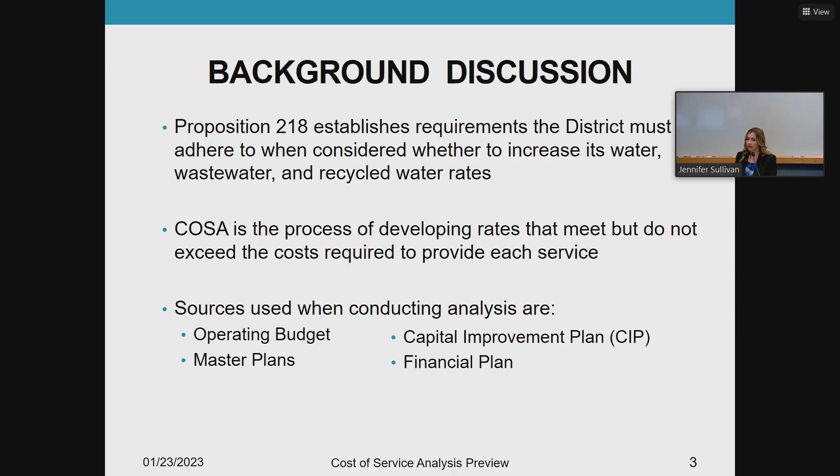Next slide. Okay. So the California Constitution, specifically Proposition 218, consists of requirements that the district must adhere to when considering whether to increase its water, wastewater, and recycled water rates. The cost of service analysis assists in developing rates that meet but do not exceed the costs required to provide each service. There are certain sources of information that are important in conducting the analysis, including budgets, master planning documents, the district's 5-year capital improvement plan, as well as the district's 5-year financial plan. Next slide, please.

The district is currently updating the water master plan, which also... can you go back one? Thanks.

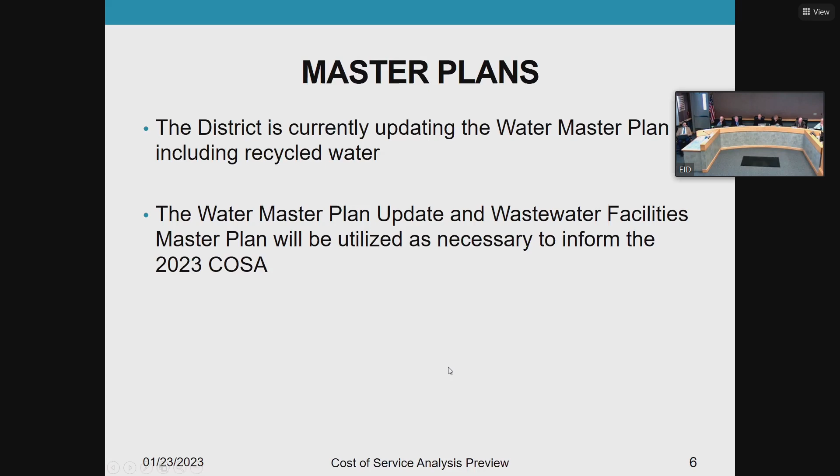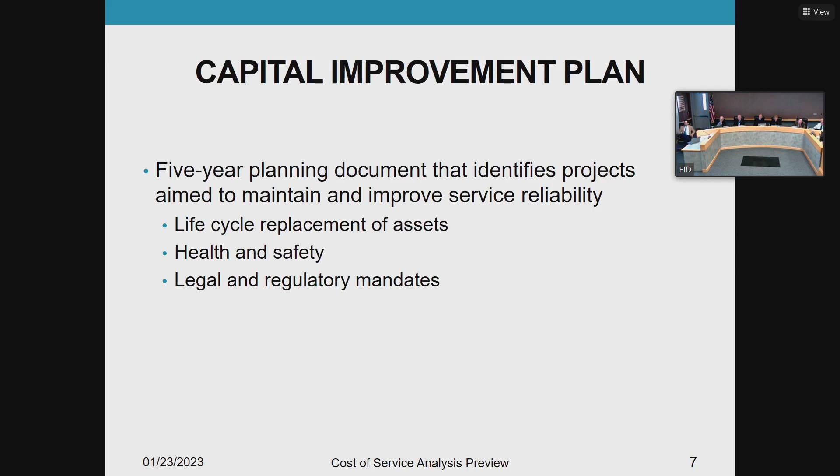The district's capital improvement plan is a 5-year planning document that identifies projects aimed to maintain and improve service reliability, addressing areas such as the life cycle replacement of assets, health and safety, as well as legal and regulatory mandates.

Just a snapshot of the 2023 to 2027 capital improvement plan recently adopted by the board.

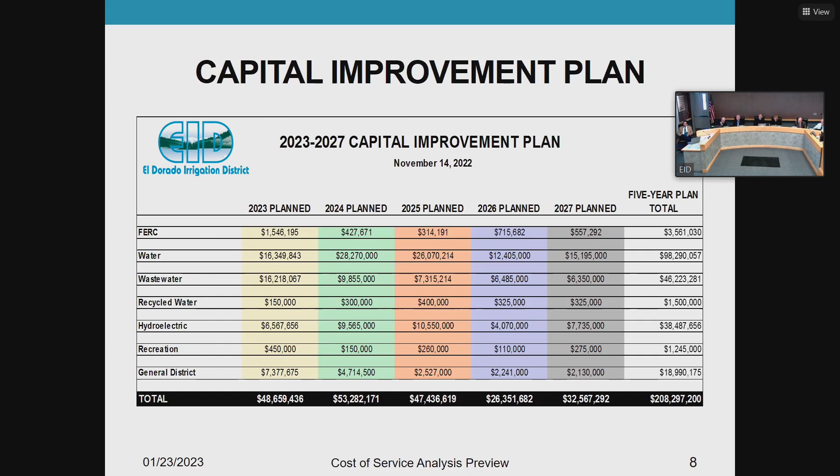Hang on before we switch this one. One of the reasons we're updating the cost of service study was the forecast in our financial plan. I'm sorry, go forward one.

Thank you. We didn't maintain our cash reserves at that level. That was shown in the financial plan, so we're updating the cost of service study to increase our cash reserves to that level. And then also the debt service level, we weren't going to be achieving that in future years as well. So those are the two main reasons we're updating the cost of service study. Thank you.

So as discussed during the approval of the 2023-2024 operating budget and financial plan, staff faced a number of challenges in preparing the plan. Some of those results, as Jim pointed out, included projection of low debt service coverage and low cash reserves. Forecasted rate revenue is not high enough to fund the CIP and maintain adequate cash reserves, as well as lower projections of the FCC revenue.

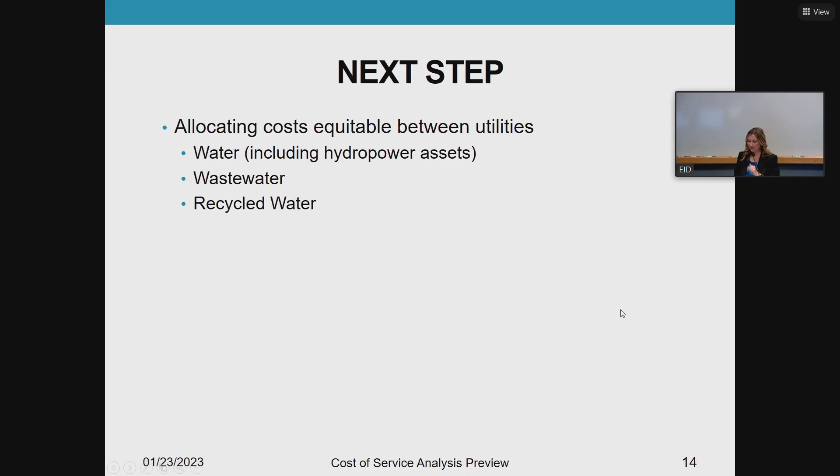So in order to allocate the costs equitably between the utilities, several factors need to be considered. These factors include the allocation of property taxes, water rate revenue-based charges, allocation of debt service coverage, as well as overhead charges. So we'll take a look at each of these individually briefly.

So the allocation of property taxes, our past practice was 60% to water utility and 40% to wastewater utility. These percentages are similar to our water-only accounts, which is about 64%.

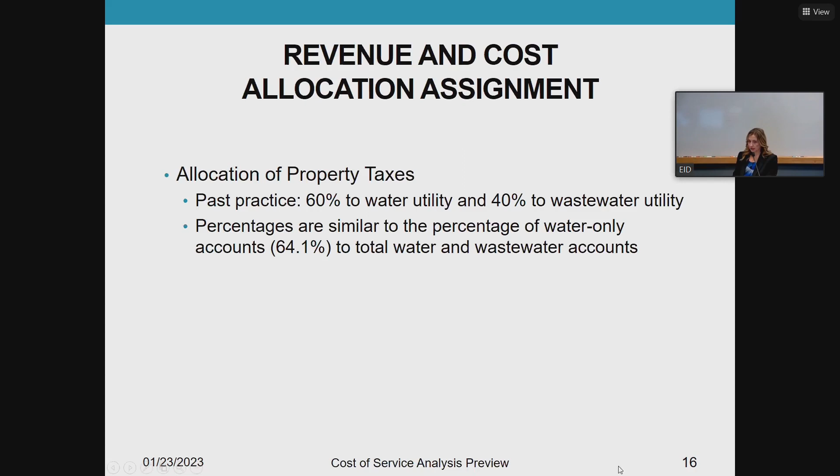In 2009, the district adopted a more aggressive water conservation structure designed at that time to collect 30% of the rate revenue from fixed and base charges and 70% of revenue from the volumetric charges. During the 2010 cost of service analysis, the board did reallocate that to a 50-50 ratio, after determining that meeting the revenue requirements of the district were too volatile when the water conditions varied, or when the water varied due to the weather conditions. And the district has maintained this 50-50 ratio since then.

Our allocation of debt service is allocated based upon the bond documents when originally issued and cannot be reallocated.

And then our debt service coverage, as we've mentioned before, the bond covenants require the district to obtain a 1.25 coverage. Our administrative regulation also sets the financial goal of the debt coverage at 1.7 to 2.0 times, including the FCC revenue, and then just 1.25 times without the FCC revenue.

The same AR also requires that rates generate enough net revenue to adequately fund the pay-as-you-go projects.

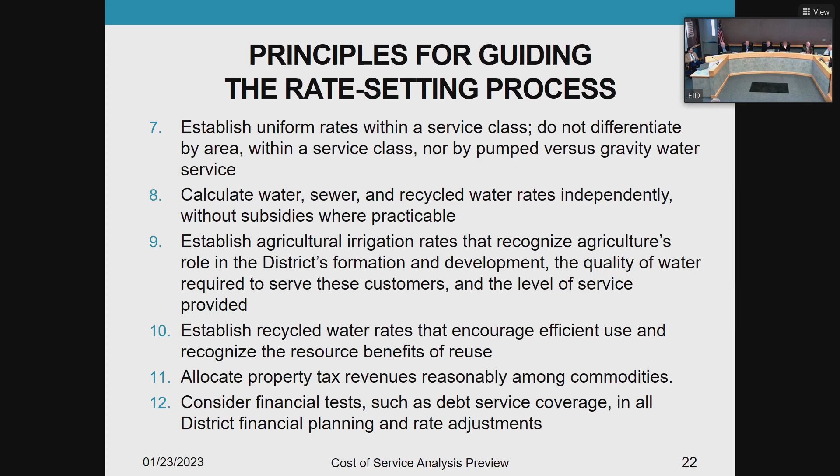Jennifer, for the RFP for the consultant, if I had seen that word published, I would have thought we've already published it and would have asked for a copy. So when you do publish it, can you share it with the board? Yes. Thank you. Absolutely.

Next slide. Pat, do you have a question? A couple of comments on the presentation and observations. First of all, by our past actions, the board has already solidified many of the inputs that go into the cost of service study. We approved the budget, which is a big chunk. We approved the capital improvement plan, which is another big chunk. So the consultant really just needs to take all our costs and divide it by our number of customers. We don't want to spend a lot of money on it. A simple division—no, I'm being facetious—but my point is, we've already established the baselines.

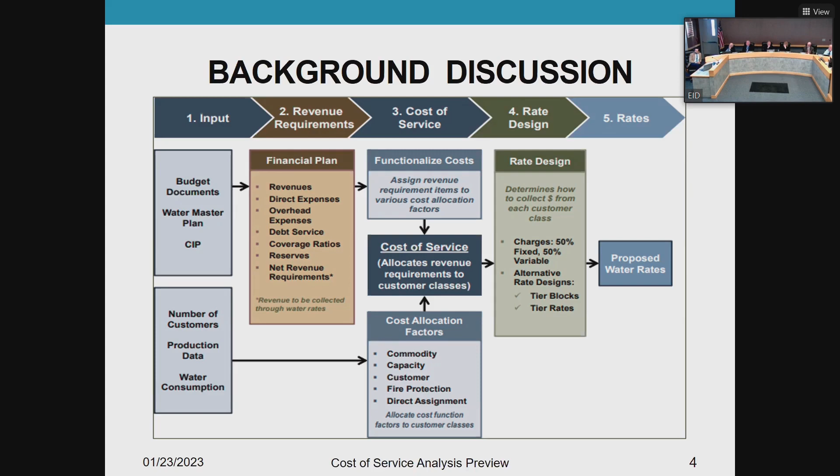Under input, that's almost all staff. The revenue requirements, I believe that's all staff. However, they'll take that and determine what the net revenue requirements will be. And once those net revenue requirements are determined, they'll use their history and background to do the functionalization of the costs, based on peaking factors and meter sizes that we hadn't used in the past. So that's a lot of their efforts, item 3 and 4. And then we'll bring back the proposed rates for the board's approval.

So the consultant would be more in stages 3 and 4, probably. Yes, but they will also come up with the net revenue requirements after considering the revenues, the direct expenses, the overhead, and non-rate revenue that we have from like property taxes and things. Then they'll come up with the net revenue requirements that need to be divided out through all the costs to our ratepayers. I didn't mean to steal your thunder, Jamie, but this has kind of been etched in my mind over the last 20 years.

I appreciate it. Director Anzini? Yeah, one other thing that we haven't really paid attention to, or we have paid attention to, but we haven't made that difference or that buffer, is where we've had a lot of major environmental issues in the last 3 years because of the water coming in, the pipes busting, and of course the Caldor fire. We do have an emergency fund. But recently, we just suffered another $500,000 worth of emergency funding for staffing to deal with our emergencies over that weekend. So we have to kind of buffer that in there to be prepared, so we're not caught holding a debt from not planning on these emergencies. Emergencies are getting more and more now, so.

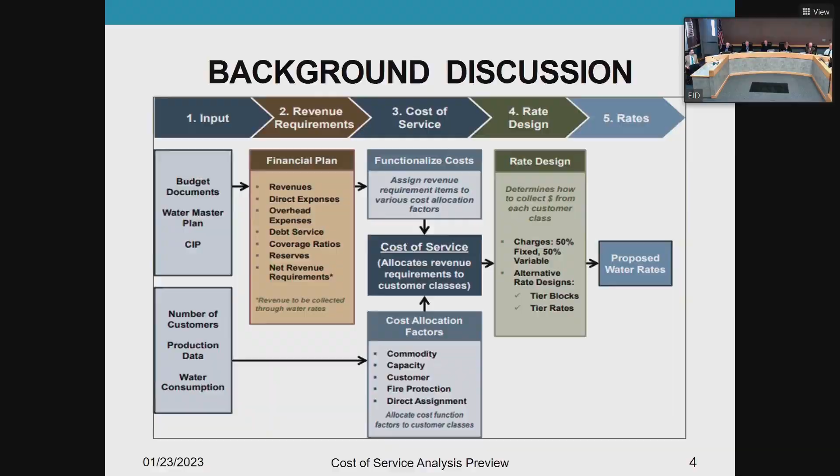Water everywhere, not a drop to drink. We used to call these drought updates, but not quite a flood update, but it's somewhere approaching that status. Well, if I may, Dan, first of all, I want to compliment the Corcoran Day acorn forecast. Pretty good. Knock on wood, we still got a ways to go, but where's the jar? I know. The jar got a little musty in my office, so it became compost. Hey, there's something to it.

Right. I think our title slide today really sums up what's occurred over the past 30 days. Underneath this wall of water is the Kyburz Diversion Dam. On your picture, river left is the diversion gates, and then our pipe is actually below our diversion dams. That was taken by Brian Cooper on that morning of almost 10,000 CFS. There's no propane tanks in that picture, but as you can imagine, there was quite a bit of material and water coming down the South Fork American River. Next slide, please.

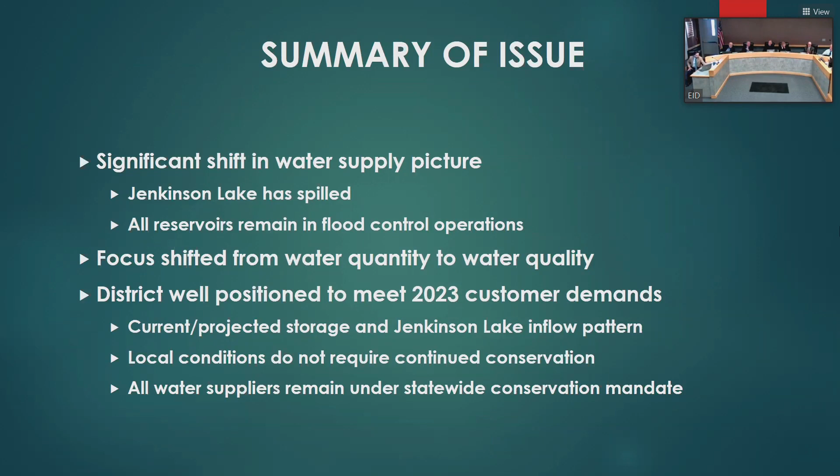Dan, during this event and leading up to the event, those gates are all closed for our flume repair, right? That is correct. Can you actually go back up one slide, Jim? That is correct, that's our canal annual maintenance, but unfortunately, as you can see on the left, the water was so high it's going over and into the canal anyways. And so that's why the spillways are so critical, to allow us to evacuate all that stormwater while crews continue to perform the annual maintenance process. The spillway at Flume 40, what? There's about a dozen primary spillways. They used to be every mile. There are various locations where many of those can actually be operated remotely via SCADA telemetry. Okay. So this time of year, we keep those open for the purpose of stormwater, debris, things that we don't want to bring into El Dorado Forebay and create a maintenance headache down the road. So, thank you. Next slide, please.

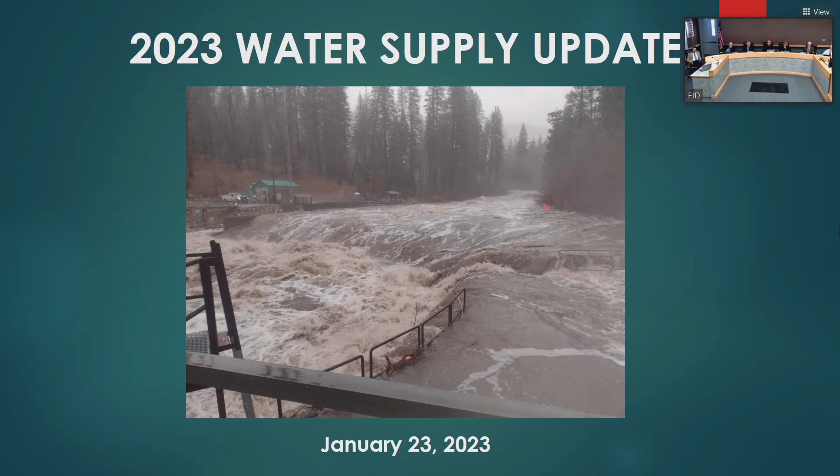Okay, quick summary of the issue. Obviously, we have a significant shift, I think is perhaps an understatement, in the water supply picture. Fortunately, we've gained quite a bit, almost 16,000 acre-feet of storage in Jenkinson Lake, which is now spilled. Camp Creek Tunnel remains closed because frankly, we have more water than we need. And local inflows continue to cause the reservoir to spill.

Obviously, very low demand, very nice saturated watershed above us. Fortunately, a lot of that with the low snow is snow, and obviously we got a lot of rain in those storms, but now we've got a nice snowpack all the way down to Pollock Pines. All of our reservoirs remain in flood control operation, and we've really pivoted from water quantity to water quality.

And as Director Anzini had mentioned, we did have that call for conservation requests from our customers to avoid the need for any boil water or any other requests. Fortunately, that was heeded, and within a matter of, I believe, less than 2 days, we were back on track. It just showed we just need to move that slug through the system, and our customers really responded, and we appreciate that. Obviously, we're very well-positioned to meet our customer demands for this year as well as next at this point.

We're anticipating to remain full for a period of time at Jenkinson Lake. There's still between 200 and 300 cubic feet per second going down the Camp Creek Tunnel today. Wow. That shows even absent the big flows that we saw in the news, the Cosumnes River down in Michigan Bar and Wilton, that watershed is still very wet. Now within its flood control banks, but it'll be some time probably before we even need to reopen that tunnel.

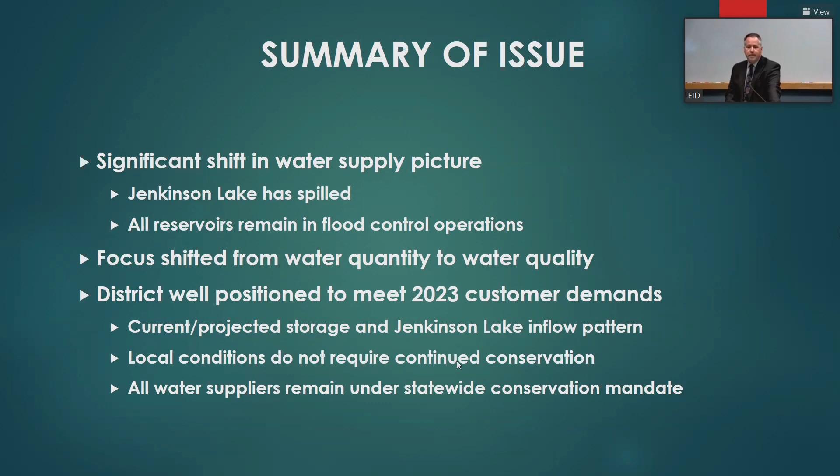Okay. I normally breeze through this slide. I want to take just maybe one more second and give some context because these two slides back to back might cause a little bit of confusion. Well, if your reservoirs aren't full, then why are we where we are? We're fortunate to be both a snow and rain-driven watershed, and our reservoirs have seasonal restrictions. And so Caples, Silver Lake, Echo Lake, and Weber Reservoir all have seasonal flash flow restrictions.

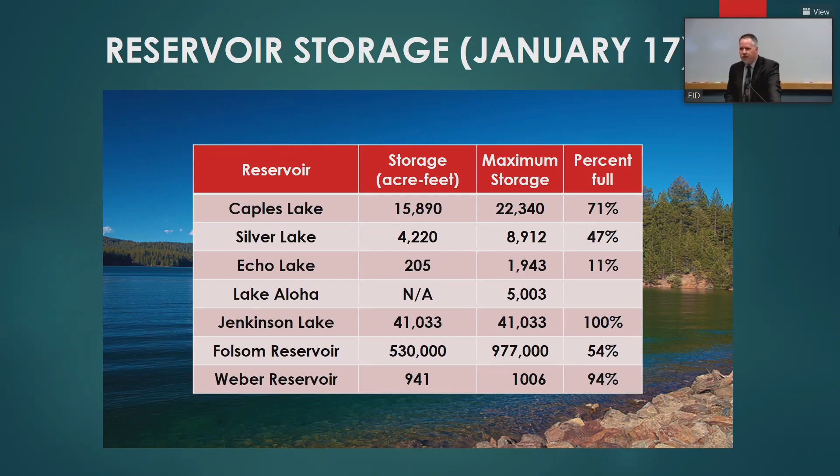So I can assure you that we are storing all the water we possibly can. We're in the process of just following that watershed response, and then when we can put in the spill boards later this spring, we will do so, and all these reservoirs undoubtedly will fill at this point. Next slide, please.

And Patrick will likely talk to you in his presentation later today about the filters at Reservoir A, and so I'm not going to dive into too much detail now, but obviously some very challenging water quality conditions, as Director Anzini described, and hopefully through some of the investments that we make today, we can address that challenge. Next slide.

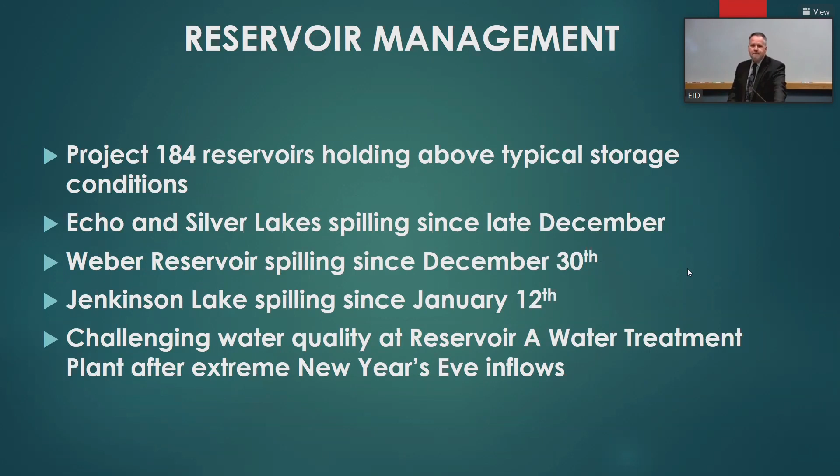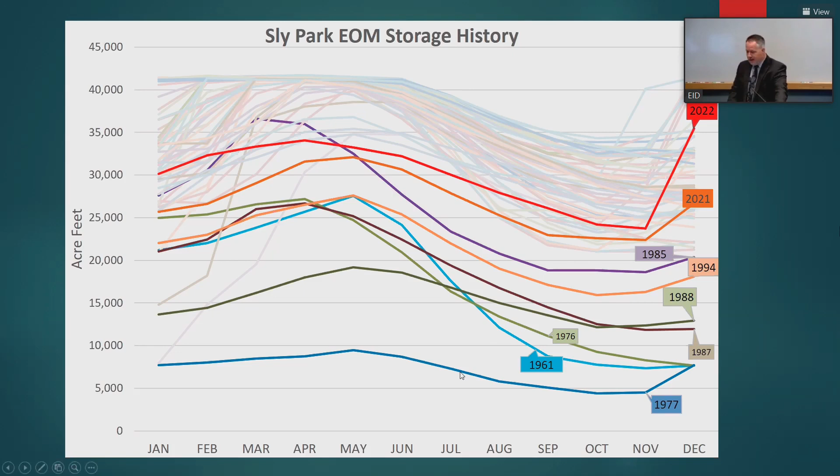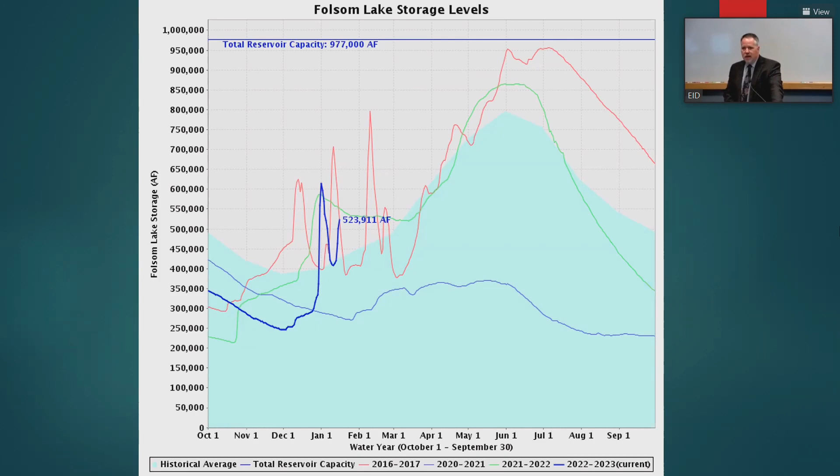Next slide. Dan, did you notice, when they built the new spillway next to Folsom Dam, right, and then redid their operation manual, was there anything appreciably noticeable as far as, did they hold on to more water than they would have, say, 10 years ago? Yeah. It's really hard to tell because they're not only just looking at conditions that are happening now, but also at the upstream storage at SMUD and PCWA reservoirs.

Unfortunately, everybody was getting so much water, they felt the need to make that large release. It was up to 35,000 cubic feet per second. It was about 20 times what was down there just a few days earlier. So I would say it factored, but I think there was just so much rain that they couldn't have really done anything different with that new facility this time around.

Just some notable statistics coming into the new year: at Sly Park, we're almost 200% of normal for rainfall this early in the year. And overall in the American River it's about 150% of normal. You'll see some snow pillow updates in our next update when we come to you. But I think we've all seen it on the news. Obviously, there was plenty of snow. You see the walls of snow along the highway. There is definitely very robust snowpack this year. Yes, exactly.

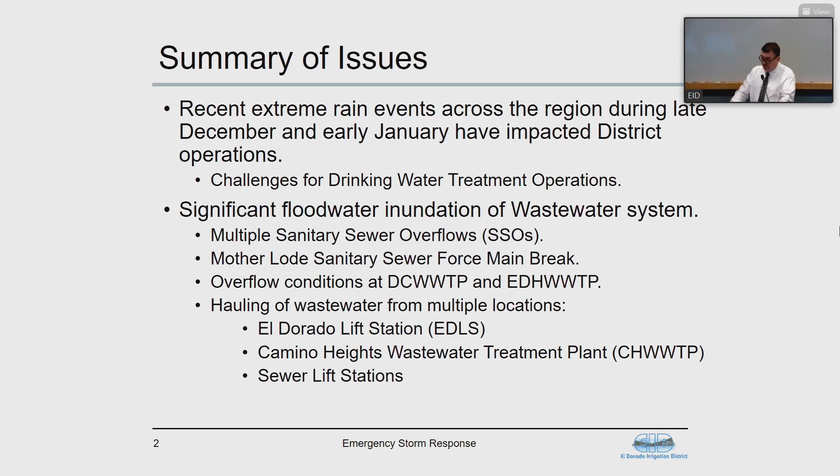Next slide, please. So extreme rain across the region, talked about a little bit today, caused significant challenges for our operation. Challenges for drinking water treatment due to high turbidity, multiple sanitary sewer overflows, the Mother Lode sanitary sewer force main to break, and overflow conditions at Deer Creek and El Dorado Hills treatment plants, and hauling of wastewater from multiple locations, which I'll discuss further in the presentation. Next slide, please.

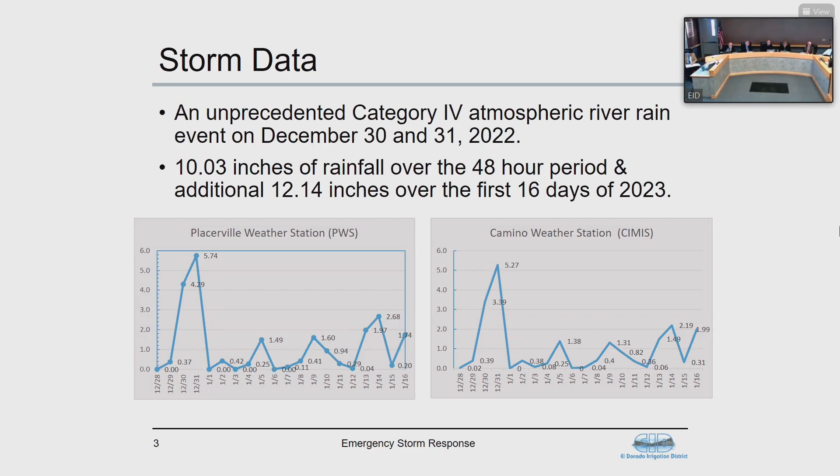So where do we haul it, Vice President Day? Several different places, actually, because both of the collection systems were pretty inundated at the time, so we had to take some and put it down in the El Dorado Hills system, and some from Camino stayed in the Deer

Creek system. So here's some storm data, unprecedented category 4 atmospheric river event. According to the Placerville Weather Station gauge from the Department of Water Resources, we got 10.03 inches in that 48-hour period of New Year's, I think it's 30/31. And so, according to our hydraulic modeler, that's a 200-year, 2-day storm.

Then we got an additional 12 inches over the first 16 days, so it just seemed like it kept raining, including 5 inches over the recent Martin Luther King weekend. So the nearly 2 feet of precipitation equates to about 14 gallons of water for every square foot of our service area, just to give it some perspective.

Next slide, please. So the impacts: widespread flooding throughout our service area, a break in the Mother Lode force main. For those listening who may not know, the Mother Lode force main is a downstream sewer pipeline and downstream gravity pipeline. It's a 9-mile conveyance system that services the district's eastern customers. The original pipeline was constructed in '79 and it's near the useful life. To date, about 4 miles has been replaced, and another project will be coming up shortly to replace another 3.3.

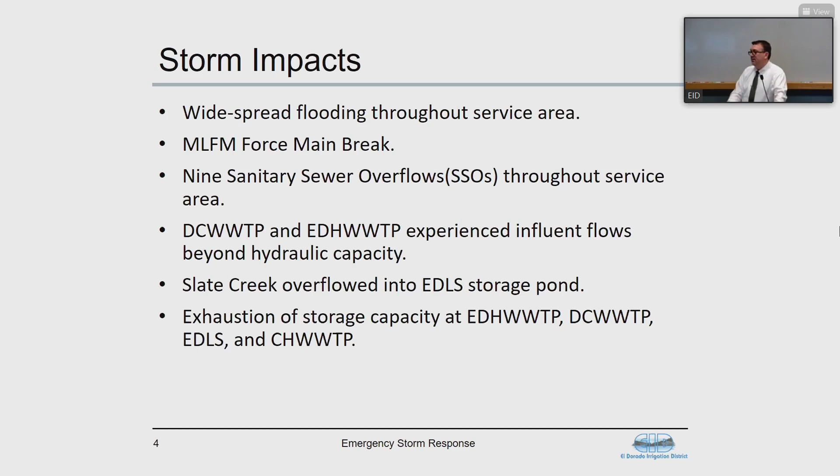So we had 9 sanitary sewer overflows. I believe we had 8 of them concurrently. Deer Creek and El Dorado Hills experienced flows beyond their hydraulic capacity. Slate Creek overflowed into the El Dorado lift station storage ponds, and we exhausted the storage capacities of our El Dorado Hills, Deer Creek, and Camino Heights treatment plants, as well as the El Dorado lift station. Next slide.

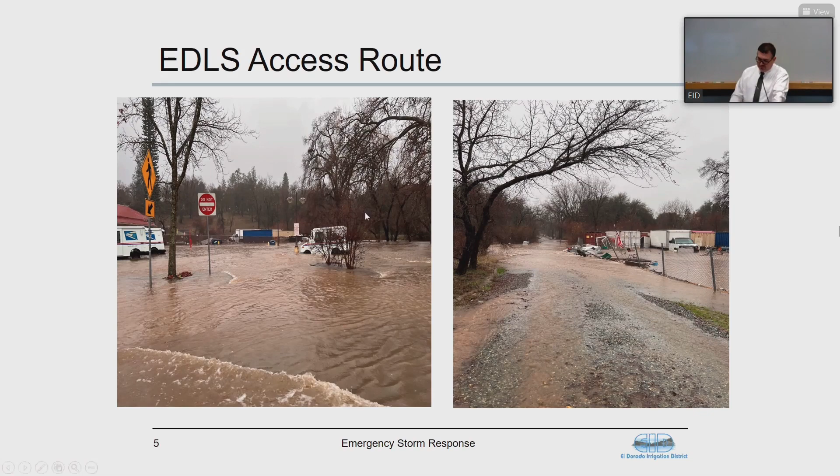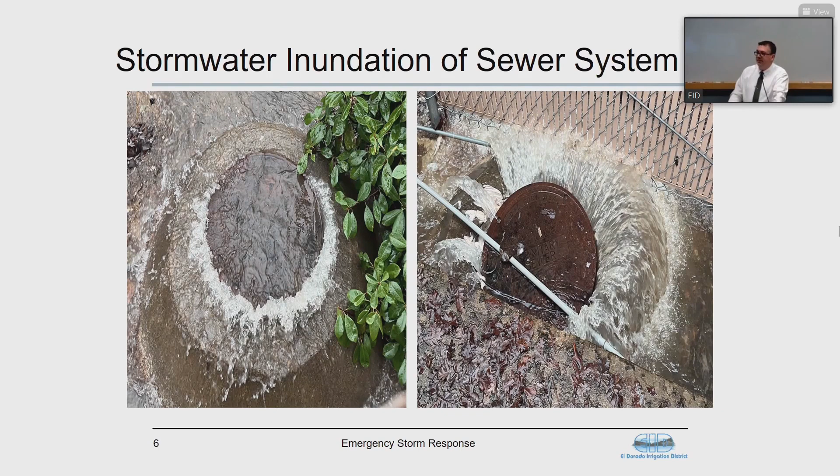Both plants had influent flows in excess of 20 million gallons. And for perspective, Deer Creek has a dry weather design flow of about 3.6, and El Dorado Hills is about 4.0. So more than 500% of the plant's capacity. With that high of flow, the emergency storage in the facilities was exhausted relatively quickly. I should say every effort was made to treat as much of the incoming flow as possible. Next slide, please.

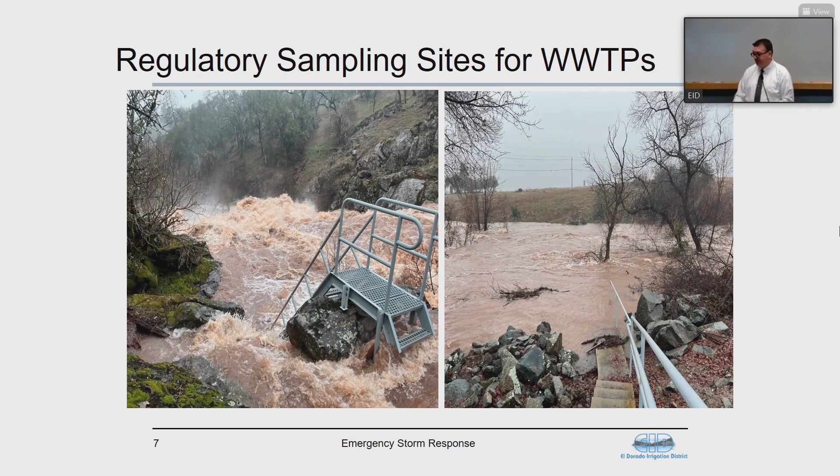At the El Dorado Hills facility also, all of the stormwater and some of the drains in the plant are directed to a series of 2 concrete-lined storage ponds. The floodwater overwhelmed the pumping capacity of the ponds, and we had to bring in some additional temporary pumps to have the ability to control that level.

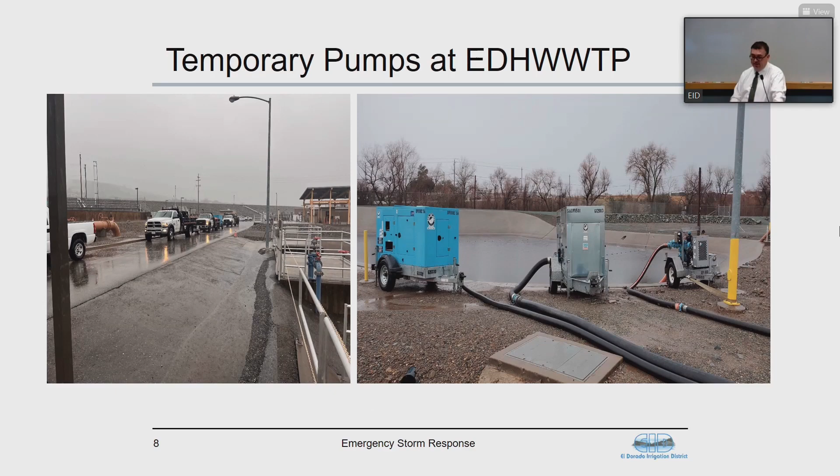Next slide, please. So the Mother Lode force main break happened overnight, about 3:45 a.m. It had been pumping pretty consistently. The break occurred just upstream from the 2 that we had in October 2021. And as a result of those breaks in 2021, we had reduced the pumping capacity to lower the pressure in that force main, and we were operating at that reduced pumping capacity when it broke.

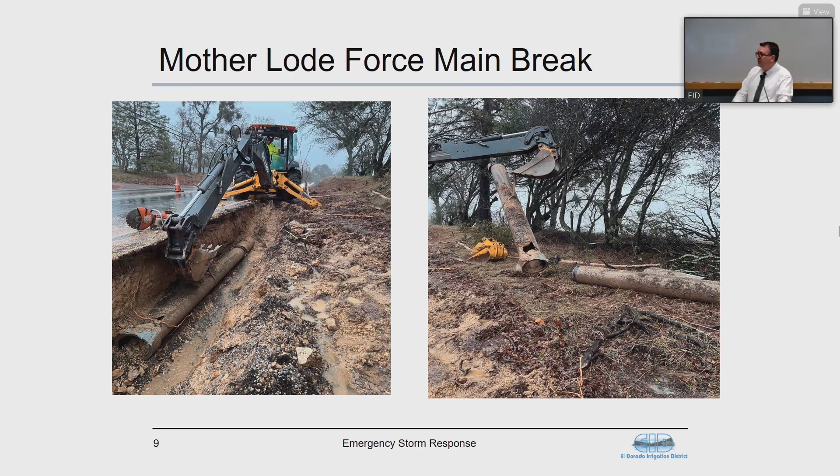So we contacted Doug Veerkamp General Engineering. They mobilized and completed the repair, and the pipeline was back into service that evening. But since the pipeline was already operating at the reduced capacity, that capacity was reduced even further to maintain the pumping capacity that we did have in the station so that we could move as much water as we could through that conveyance. Next slide, please.

So a little bit about the operational response. Our sanitary sewer management plan, our overflow response plan, and all of the permits that these facilities operate under have similar language of a duty to mitigate, which says that we have to take appropriate action to secure the area, remove the cause of the overflow, and clean up, all to minimize health hazards to the public and protect the environment.

I want to say district staff rose to the occasion. They acted safely and professionally. Many of us worked a lot of hours with 0 accidents or injuries. In fact, we've gone over 550 days without a lost time injury. Awesome. That's amazing.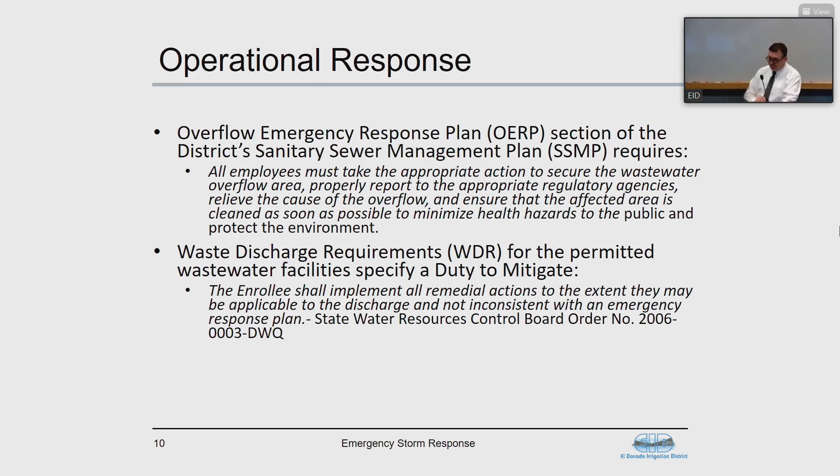So, the El Dorado Hills lift station hauling operation: Slate Creek overflowed its banks and inundated the storage ponds at the lift station. Once the creek flow receded, hauling operations had to begin. Flows to that lift station exceeded the reduced pumping capacity for the next several days, and by our calculations, it was almost 1 million gallons a day more than we could pump through the conveyance.

So once again, Doug Veerkamp General Engineering was utilized to help haul. They used 6 to 10 trucks and hauled approximately 700,000 gallons a day, while district staff hauled about 100,000 gallons a day out of there. Hauling began on January 2nd and continued through the 12th, when it appeared we'd have a break in the weather. Unfortunately, we received another 5 inches the coming weekend, and it had to resume again on Sunday the 15th and continue through the 17th.

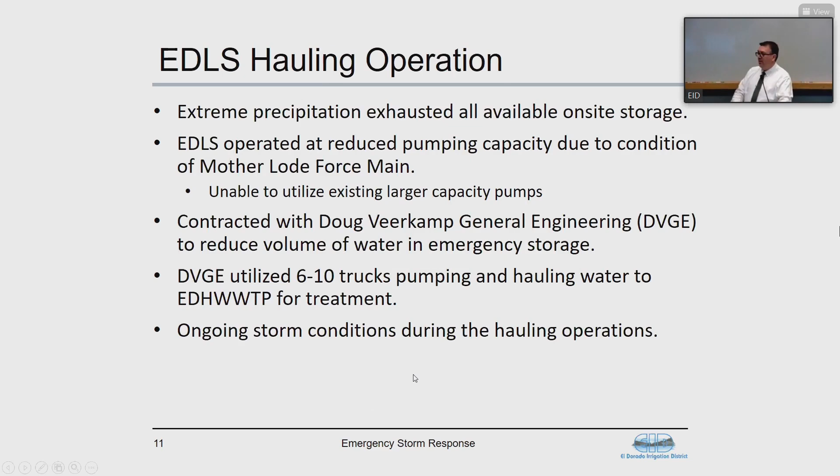As I stand here today, we've made some good ground. There's still about 850,000 gallons, but we're able to pump more with our pumps than it's coming in, so we're slowly lowering that pond down.

Next slide, please. So there's a picture of the creek coming over the bank. Obviously with hauling, we had to wait for the flow to subside. I should add too, that after that happened, we came in and added some additional berm on top of that and cut a little swale below it to prevent that from happening in the first place, or happening again. On the other side is pictures of both Veerkamp's and our staff's operation hauling out of that lift station.

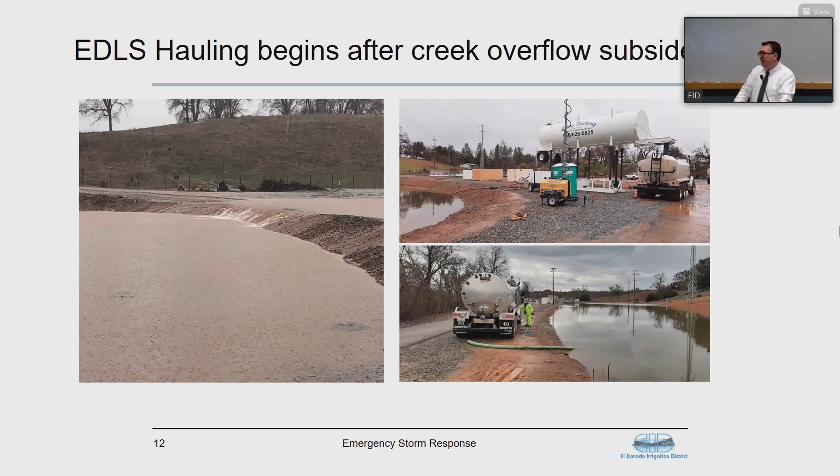Slightly better news at Camino. The storm event exhausted the facility's storage capacity and contractor hauling was necessary, but overflows were avoided. This is a land application plant, so the only way to move water through the plant is to actually spray it on the fields, and by permit, we're prevented from using those land application areas if the soil's saturated. So essentially, the only way to get water out of the plant was to move it out with trucks.

Again, hauling began on January 2nd. This time we used Sierra Site Services and Sweet Septic and some district staff, although we only had 2 tanker trucks and they were kind of split between the 2 areas. We stopped it on the 12th, but unfortunately, again, the 5 more inches of rain. We had to start hauling again on the 18th and 19th, and as I stand here today, we think we've made enough ground—we've just used district staff over the weekend. We've made enough ground that we can get to where the ground will dry out enough that we can begin moving water through that plant.

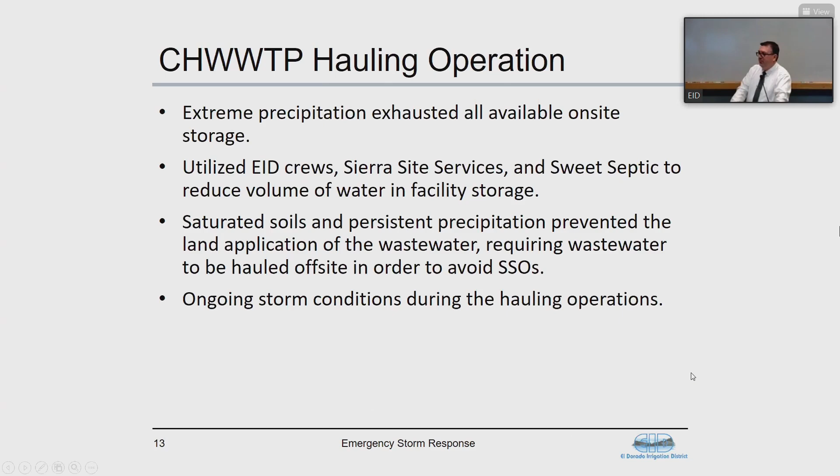Next slide. So there's just a picture of the storage pond. On the left side is both a district truck and a contractor truck. On the right side, that little caged area, that's the pond they're hauling out of, and that's the overflow that goes to the next pond. So you can see they were making some progress in that pond.

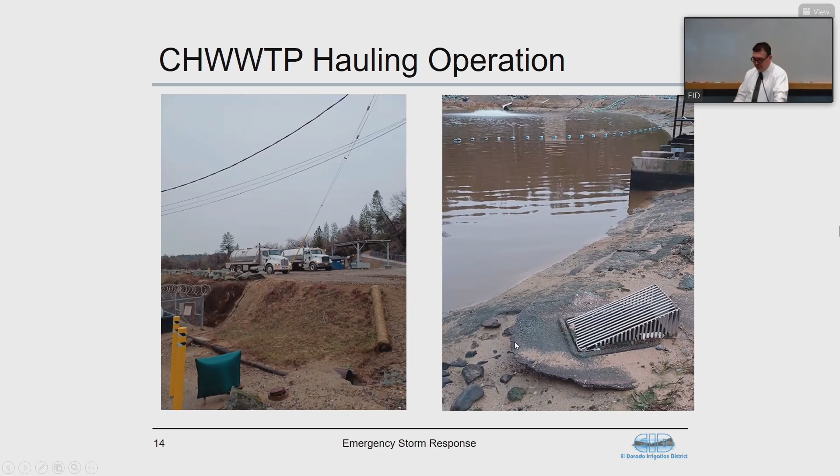A little bit of the timeline of events. So December 30th, the storm started. We had multiple high-level alarms in lift stations. Nothing had overflowed yet, but we had to go out and respond that night. On the 31st, it just continued. The Mother Lode force main break happened. The creek overflowed into the pond. That was the big day where just everything got inundated. We had to bring in the emergency pumps.

From the 2nd through the 12th, continued response daily and sometimes around the clock trying to keep the water from overflowing. Then we thought we really had a handle on it, but lo and behold, the following weekend another 5 inches came, so we had to do some more hauling. A little bit of the costs on the bottom there. I should note that the Camino Heights hauling—we spent about $4,800 more than what that number says, because this agenda item was published before we finished hauling. Next slide, please.

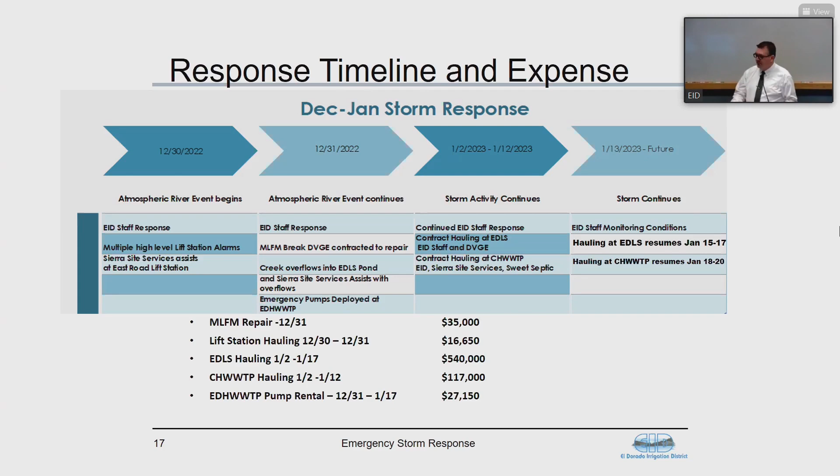So here's the emergency expenses. A lot of money. And as I said, we spent about $4,800 more than that.

We are seeking recovery of the expenses in coordination with Cal OES. Right now, we're not sure with the emergency declaration if there's federal or state funds, but we're working with County OES, and we will pursue trying to recover these costs.

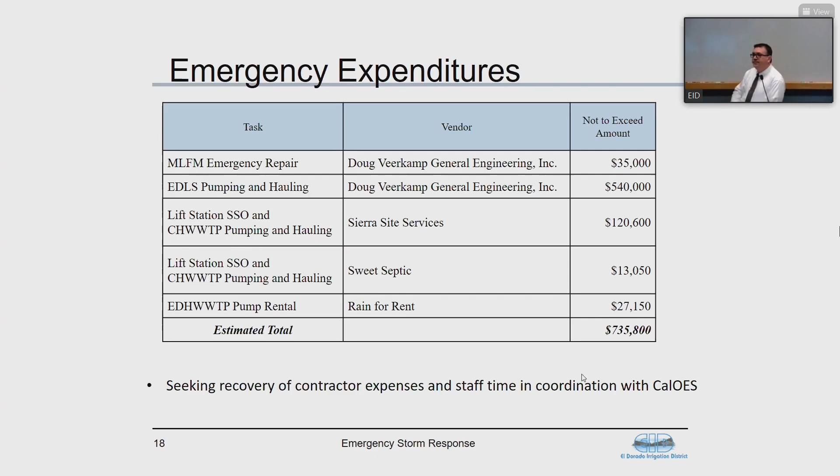So, will you please? Option 1, declare an emergency under applicable provisions of the Public Contract Code and Public Resources Code. Ratify the general manager's award of a construction contract to Doug Veerkamp General Engineering in the not to exceed amount of $35,000 for the emergency repair of the mother lode force main.

Ratify the general manager's awards of wastewater pumping and hauling contracts to Doug Veerkamp General Engineering, Inc. and Sierra Site Services in the not to exceed amounts of $540,000 and $120,600 respectively, and delegate, authorize, and direct the district general manager to take all further actions necessary to respond to the emergency declared herein. Option 2 would be take other action as directed by the board. Option 3, take no action. And staff is recommending that we have approval of option 1.

I'm going to move option 2, and I'll make a reason why. I would think it would be appropriate for this board to petition the state because of our exemplary past practices of SSOs. This was way beyond our capability of controlling it, and I'm afraid that the state might come in with a violation. Hopefully, I've talked to Jim about this, but I think if the board took action to petition the state that it was way beyond our capability to alleviate the problem, that maybe we would be exempt from the SSOs.

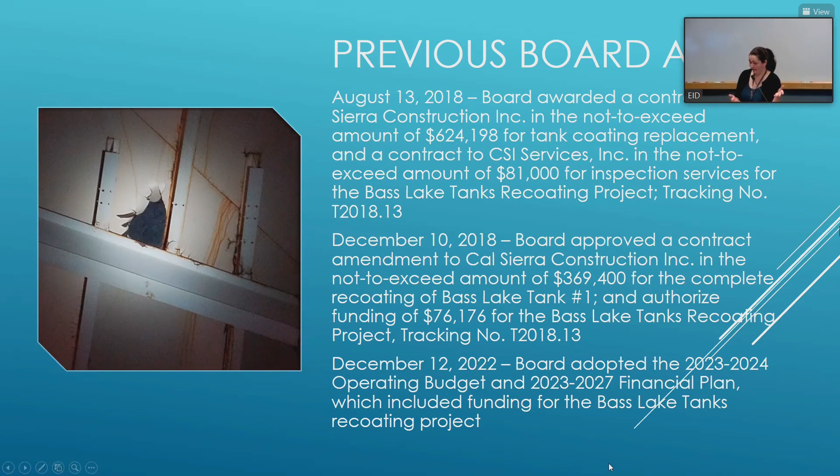Back in 2018, the board awarded a contract to Cal Sierra Construction to perform the recoating of the interior of Tank 1 and Tank 2 above the high water mark. However, later that year, we came back to the board for an amendment because we found that the interior coating in tank number 1 was actually in a failing condition. So we changed from doing work in both tanks to doing only work in tank number 1 and doing a full recoating of the interior. Then last year, we came to the board with our operation budget and financial plan and asked for funding to include the Bass Lake tanks' recoating project in 2023.

A summary of the issue: the district has 37 drinking water tanks and reservoirs throughout the system. 20 of them are welded steel drinking water tanks, and the industry standard recommends that welded steel tanks be recoated at regular intervals, about every 15 years.

As a note of information, district staff plan to further describe our tank recoating plan at the next board meeting, the February 13th board meeting, so look forward to that. Can't wait.

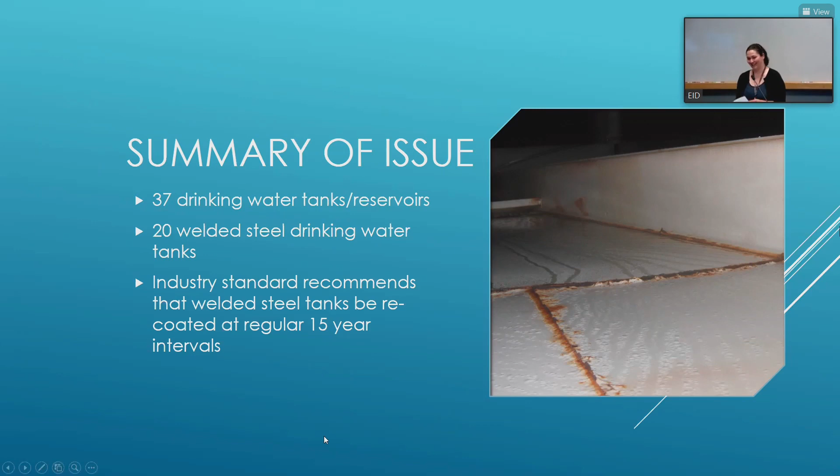A little bit of rust is the iron in our water, right?

So the Bass Lake tanks were constructed in 2005. They're each 4.1 million gallons. And as stated before, back in 2018, 2019, we did recoat the inside of tank number 1. The Bass Lake tanks actually represent a major transmission hub in delivering water from our eastern supplies to our Cameron Park and El Dorado Hills customers.

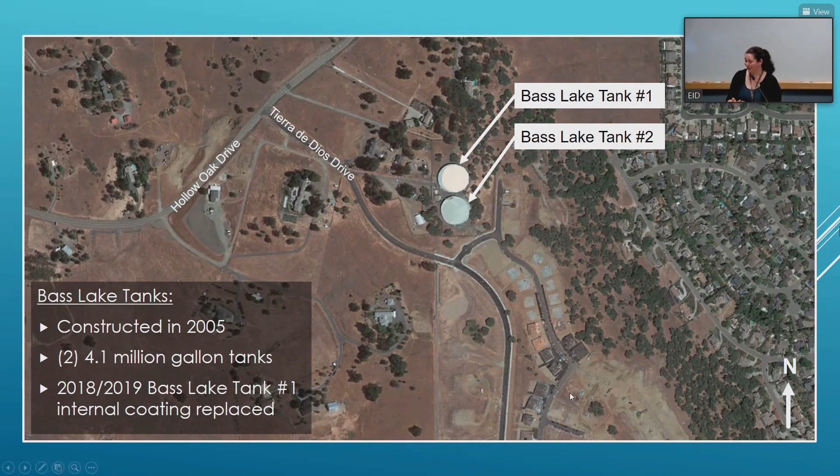I just want to note on this slide, as you can see, there were some houses being built when this photo was first taken. Those houses now exist. We will be reaching out to the surrounding properties and homeowners to make sure they know about the project and are aware of it, so if they have any questions or concerns, they can reach out to me. That's my area, we'll be reaching out to them.

There'll be no comments. So, scope of work: on tank number 1, we're going to add a staircase and guardrail, and this photo at the top shows the guardrail on tank number 2 that was just completed last year.

And then the tank on the bottom right shows the staircase on tank number 2, which was also, again, completed last year. So we're gonna add a staircase and guardrail to tank number 1, Bass Lake tank. We're gonna then touch up the interior coating following the welding of putting those items onto the tank, and then recoat the exterior in full. Then on tank number 2, we're again gonna add the staircase and guardrail, recoat the interior in full, recoat the

exterior in full. I just wanna make special note of the 2 photos on the bottom left. These are from tank 2 at Reservoir 2. However, they are important for this Bass Lake tank project because they're showing the wedging of the rafters. And on Bass Lake tank number 1, we actually found on the top flange of the rafters the original primer coating. So that was part of why the coating was found to be in failure on Bass Lake tank number 1. So I'm sure we'll see that on Bass Lake tank number 2.

I got a question. Like the tour you gave us of the tanks in Camino, I think, there was a lot of structural damage there. Do you anticipate any structural issues with these 2? We had no structural issues with Bass Lake tank number 1, so we don't foresee any with Bass Lake tank number 2. Good answer.

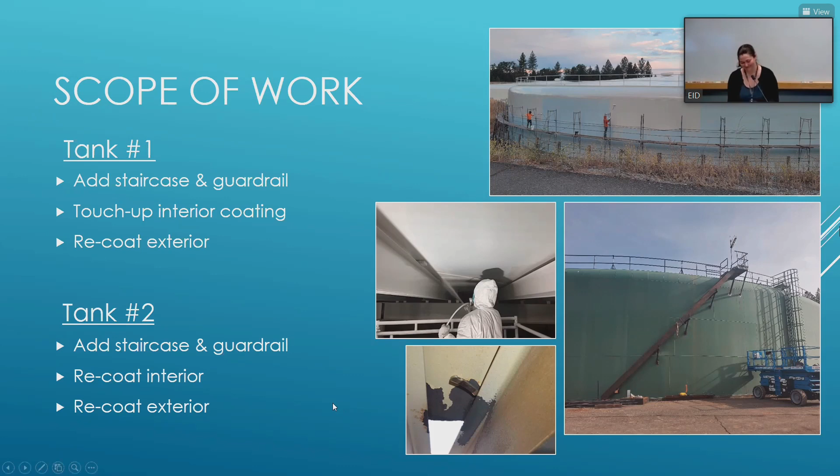Next slide. So we released a request for qualifications in early 2022. We had 8 contractors submit, 3 contractors were pre-qualified. We then released a request for bids in December of last year and had the bid opening earlier this month. All 3 contractors that were pre-qualified bid on the project. Next slide. So this is a summarization of the 3 bids we received. The bid from Cal Sierra Construction, which is the contractor that performed the work on Bass Lake tank number 1 back in 2018, was found to be the lowest responsible and responsive bidder for this project.

Next slide. Ohio, yeah, I know. Were they going to bring the whole team out? The moving costs, yeah.

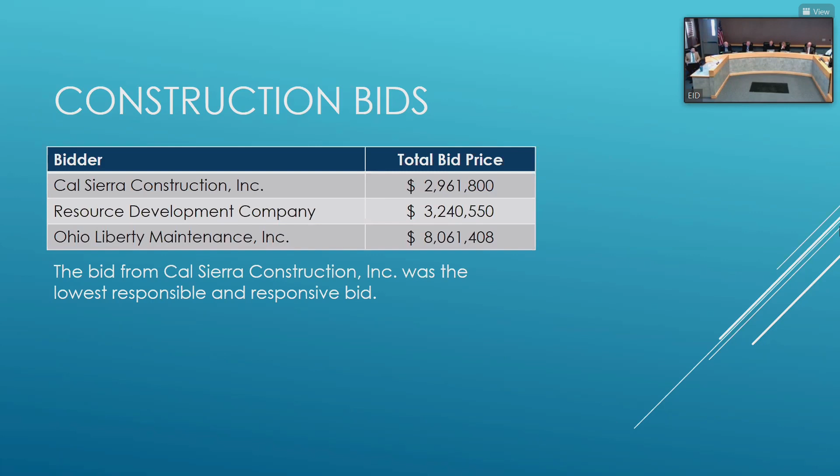We then also released a specialty coating inspection request for proposals December of last year, and we received 4 proposals. Proper surface preparation and application of the coating of the surfaces is critical to the success of the adhesion and longevity of the coating system, so it was important for us to have specialty coating inspection that had the experience and knowledge to ensure we get the best product for the district. Next slide. So we received 4 proposals. The district recommends award to MCS Inspection due to their relevant experience, qualified inspectors, and their lowest proposed cost.

It's actually good to see bids coming in that are all, other than one, fairly close to each other. I think maybe the market is stabilizing a little bit instead of people just throwing the big number and figuring they'll get some. Yeah.

So environmental review. Environmental staff reviewed the project activities and determined that it qualified for Class 1 categorical exemption from CEQA. A notice of exemption will be filed once the project is approved by the board. Funding requirements. So we need the construction contract from Cal Sierra. We need the specialty inspection contract with MCS, which comes to a total of $3,103,331. The 2023-2024 operations budget that was brought to the board previously included $2,610,420 in 2023 for this project. So this is over that amount by several hundred thousand. But the staff will continue to evaluate overall 2023 budget expenditures with the goal of not exceeding the total water operations budget. And as a reminder, the operations budget expenditures are reviewed by the board on a quarterly basis.

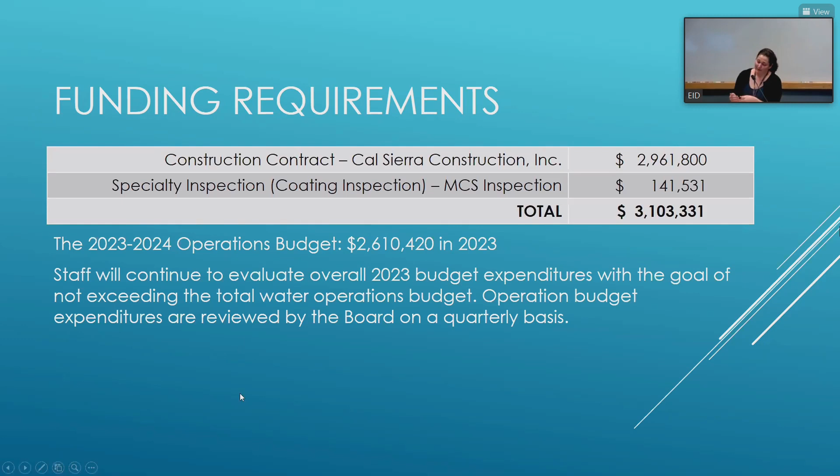Board options, option 1, award contracts to Cal Sierra Construction Incorporated in the not-to-exceed amount of $2,961,800 for tank recoating and repair services, and MCS Inspection in the not-to-exceed amount of $141,531 for specialty coating inspection for the Bass Lake Tanks Recoating Project, which staff has determined is exempt from the California Environmental Quality Act, tracking number T2021.22. Option 2, take other action as directed by the board. Option 3, take no action. We recommend option 1.

Director, move option 1? Okay, let's have a question first. Just don't get into discussion, but questions for the presentation first, okay? Question. When and if this is approved, when it gets started, what is the end date of this? We're looking at mid to late October of this year. Sure, okay, great, thank you. Yeah, Director Day. I'll move option 1. Okay. Second. All right. We have a motion and a second. Any further board comment? Yeah, I do have a comment.

It's about MCS Inspection. Just a little concern that the CEO's nickname is Rusty.

This is called a point of humor. Any comment from the room besides that one? You strike that from the record, please. Control of your audience and the board. Any public comment? Yes, that was good. Hey, go ahead. I'm back in.

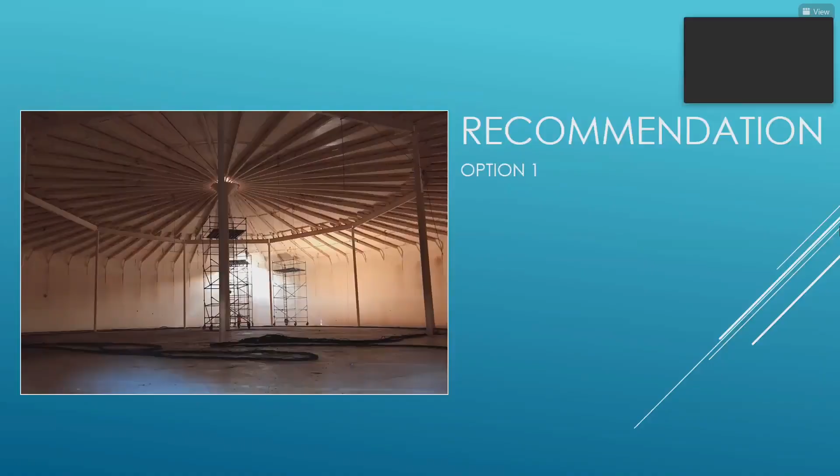Okay, good morning. John Money, Senior Civil Engineer, here this morning to discuss a contract amendment for easement acquisition for the Sly Park Intertie Improvements Project. Yep. So previous board items, we were here just over a year ago for a grant authorization for $10 million for a DWR grant, followed by a contract award in February of last year to Waterworks Engineers for the design of the proposed project. And then most recently, we were here last November for inclusion of this project in the 2023 to 2027 capital improvement plan.

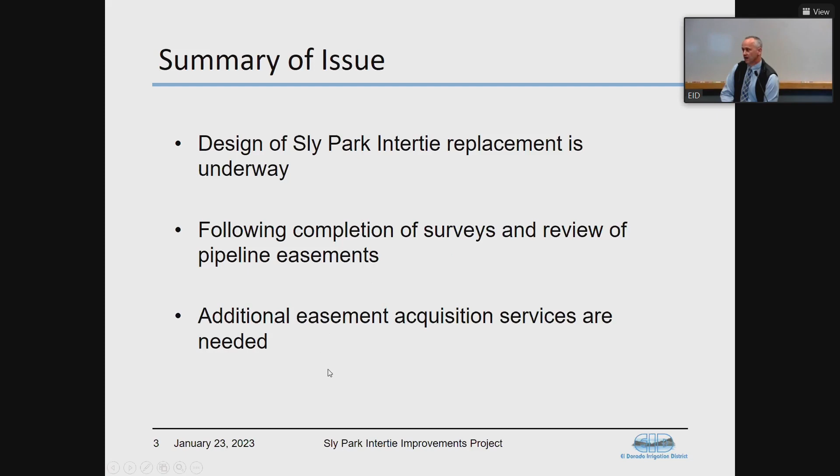Overall summary of why we are here today. The design of the Sly Park Intertie has been underway. We are just about ready to wrap up the final basis of design report. During that process, we have completed initial environmental reviews, but also our topographic surveys for the alignment, and also reviewed all of our existing easements, and we've had some discrepancies there. So we are seeking additional easement acquisition services to help perfect our access to the pipeline end to end.

A little background on the project, because it's been a while since we've been in front of the board. The Sly Park Intertie was originally constructed in 1978. It was designed to alleviate water shortages from the 1976 and 1977 drought, basically conveying water from Reservoir 1 to Sly Park. It consists of generally about 3.5 miles of steel pipe. The steel pipe was very substandard at the time, does not meet our current standards, but it provides that critical link between our two water treatment plants. Over time, the pipeline has had substantial leaks throughout and has basically failed, and it was taken out of service in 2013, or at least major portions of the pipeline have failed.

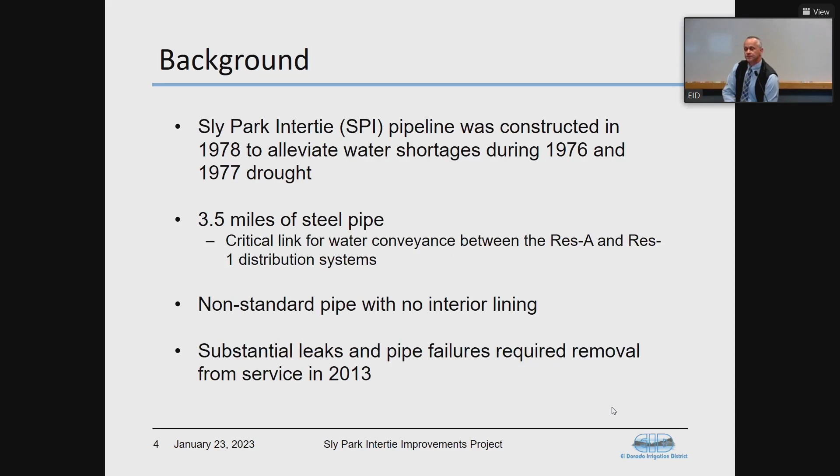Next slide. Review of our water system and where this lies. So we generally have two water sources, 184 water that comes into Reservoir 1 on the north side of Pollock Pines, and then our Jenkinson Lake supplies that come through Reservoir A. Reservoir A feeds the system through the red line right there, the Pleasant Oak Main, and it also jumps over to the north side of our system through the yellow pipeline, which is the Camino Conduit. Reservoir 1 feeds directly downhill through the blue and the black lines. That's EDM 1 and EDM 2. So the Sly Park Intertie pipeline is the green line there at the very eastern side of our facility map. So that will directly connect those two water treatment plants.

It also provides some redundancy in case we have any issues on the Camino Conduit, the yellow pipeline there connecting the two. The improvements we're proposing will allow for bidirectional flow, so we can process water both from Res A to Res 1 and from Res 1 back to Res A, which gives us a lot of operational flexibility at our water treatment plants to better combat some of the emergencies we've seen, such as drought and wildfires, and most recently, water quality issues. Res A currently is not able to be taken fully offline, so this will also allow us some extended outages at the plant so that we can finally get to some long overdue maintenance and repairs at that plant.

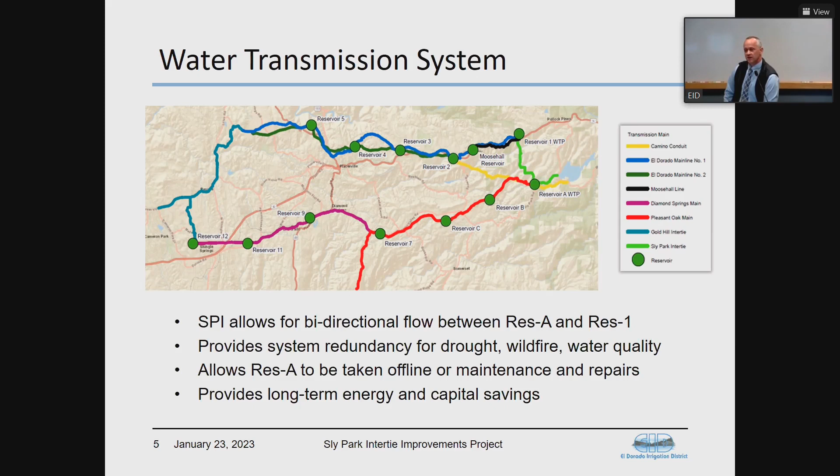It also provides us with long-term energy savings, because right now we gravity flow down the Camino Conduit to Reservoir 2 and then pump all the way back up to Reservoir 1. We will still have to pump uphill from Reservoir A to Reservoir 1, but it's a little bit less energy intensive. So, next slide, please. Here's a schematic of the pipeline shown in red.

Kind of the more impressive thing is to look at the profile there on the black kind of grid. That's the elevation profile of the pipeline as we go from both water treatment plants. So we've got some pretty significant swings in pressure as we cross those 2 or 3 canyons through the 2 plants. Question. Yeah.

When we, after it's constructed and when we activate it to experience the benefits of this flexibility, will it flow naturally downhill from Res 1 to Res A? Correct. Okay, but we have to pump it from Res A back up to Res 1? Yeah, the ultimate design will have a new pump station constructed at Reservoir A to pump up, but there's no improvements up at Res 1 to convey flow down. It's just the pipeline. Thank you.

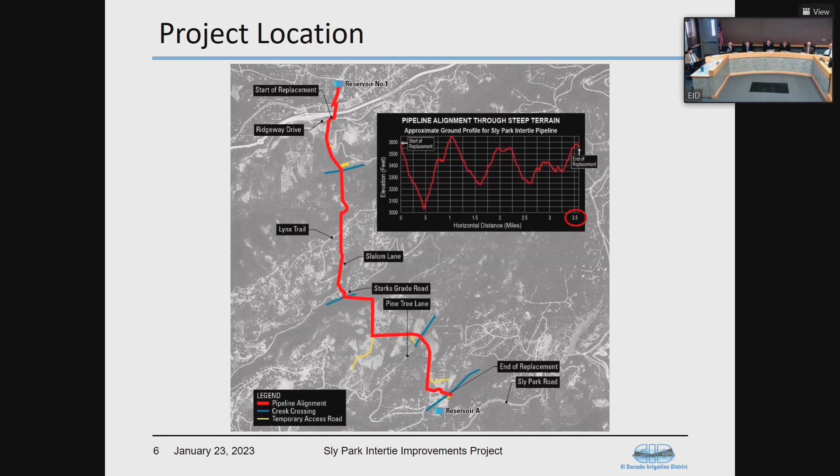Go ahead, next slide. So again, a summary of some of our topographic findings. We were pretty confident that we had easement throughout from end to end. Unfortunately, we found what indicates some deviations by matching up the topos with current aerial photography. We do have one missing easement. We do have a couple areas as shown here where we might have to slightly modify the pipeline alignment for current encroachments onto the pipeline.

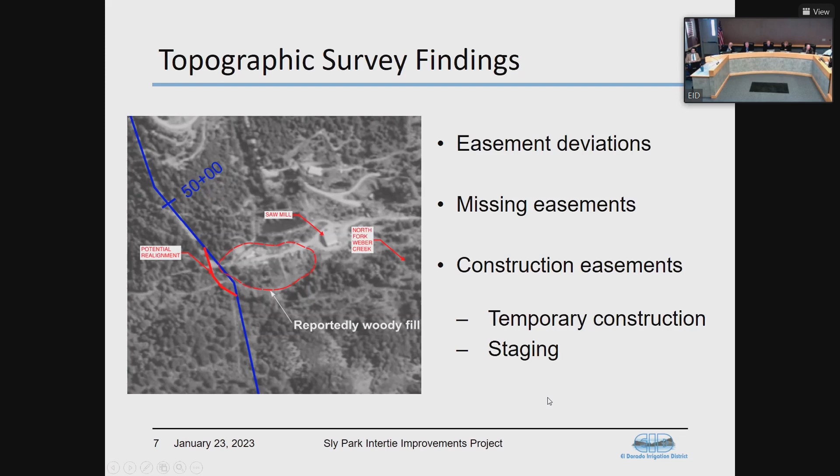And then also, we are looking for construction easements, both for just the general accessibility during construction, but also for staging areas. So next slide will show that in a little bit more detail. So this image on the left is actually a 30-inch pipeline in the middle of Nevada that our design consultant put in, and it just gives you some idea of, you know, we're going for a 24-inch pipeline, so it is slightly smaller, but they basically took a 75-foot corridor. If you can, that's what you're aiming for.

We have 20-foot easements throughout, so that just makes construction either very constrained and slow and expensive, or we can look to expand that with construction easements and give us a little bit more flexibility as we move forward. On the right, those areas in blue are proposed staging areas. We can't realistically construct a pipeline end to end. We've got to have areas where we can collect the material and give the contractor staging yards throughout the pipeline. So we'll be negotiating those areas as well.

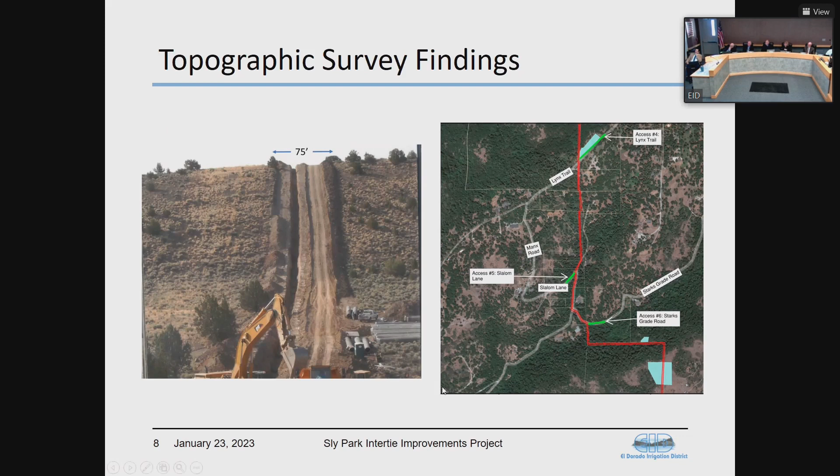Go ahead, next item. So total scope kind of consists in two different pots. The first one is easements, so we need 7 new undocumented easements. We're planning on modifying about 10 of the existing easements, and then we're asking for 13 construction easements along the alignment. The second pot is the consultant will need to come in and do a full appraisal of 7 of those properties, waiver valuations, which is a less formal appraisal of 11 additional properties, and then diary valuations, which are just kind of de minimis evaluations on smaller properties. So we've got 2 of those.

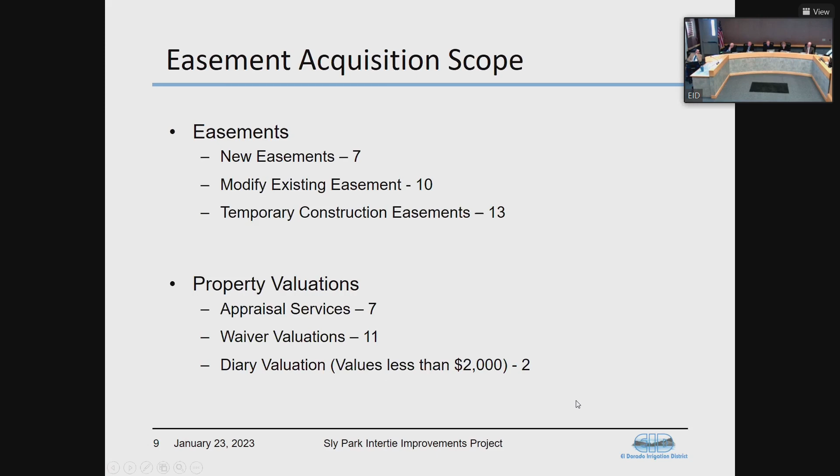So it's important to note that the initial proposal from Waterworks did include this service, but we opted to not award it at the time of the contract because we wanted to vet it out a little bit. We wanted to get our topographic surveys back, kind of see what our needs were. So the original proposal was for 280. We've whittled that down slightly to about 260. So again, the action today would award an amendment to the Waterworks contract of $259,943 for the easement services.

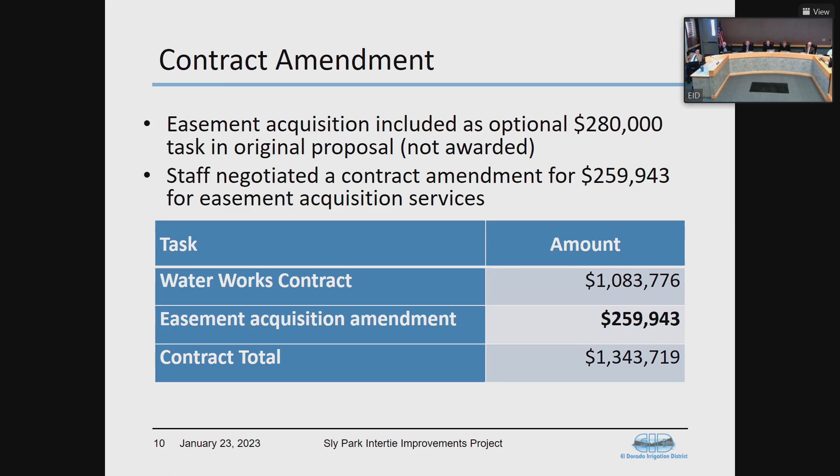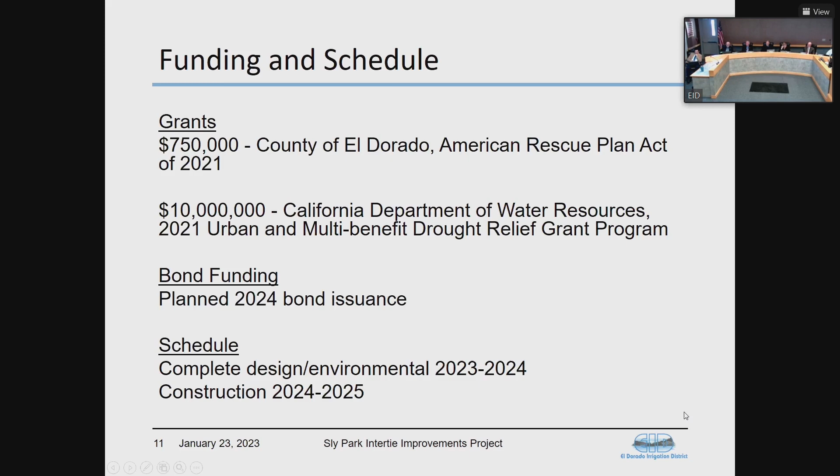As far as schedule, we're currently on target to finish the design and environmental studies by the end of this year. So we're hoping to be out to bid about this time next year for the construction contract, with planned construction in 2024 and 2025. Just as a heads up to the board, we are also evaluating a couple additional design scope modifications. The first is design of the final segment on the north end of the Sly Park Intertie.

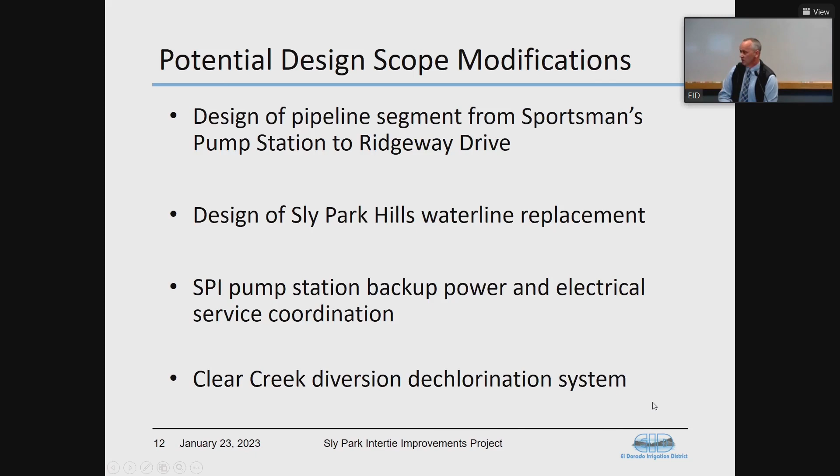And the last is to evaluate a dechlorination system for our Clear Creek diversions, which we're contractually obligated to discharge flows. Right now, that's all just off the head of the Res 1 water treatment plant. But if we shut down Reservoir 1, we still need to supply those flows. So we're evaluating how we're gonna do that. So getting back to that, we'll have some internal discussions and really vet the merit of those scope, and depending on our discussions, we'll be back to present to the board.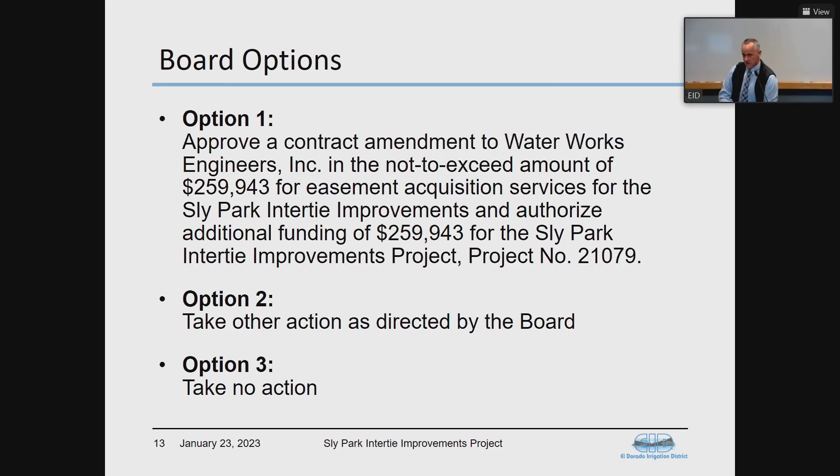Getting back to today, option 1 is to approve a contract amendment for Waterworks Engineers in the not-to-exceed amount of $259,943 for easement acquisition services for the Sly Park Intertie Improvements Project, and authorize additional funding of that same amount, $259,943 for the Sly Park Intertie Improvements Project. Option 2, take other action as directed by the board, and option 3, take no action. Staff's recommendation is option 1.

Move on. We have a motion. Do we have a second? I'll second with the comment. There's currently a significant grant request for the Camino, Rancho del Sol, and Sierra Springs Fire Safe Councils to pursue a CAL FIRE grant to do fuel reduction right in that same area going from east to west. This cuts through those neighborhoods going north to south. It seems like it might be a natural tie-in to get both things coordinated, because this would give access, and it would also do fuel reduction on that north to south corridor. And that's a very vulnerable area for the county. So I'm just throwing that out there.

Yeah, if you can provide that information, maybe send it to Jim, or if you can send it directly to me, that would be great coordination. We've actually had some homeowners that have voiced some hope that we would stage that with a grant or a coordination with the fire. So if we can coordinate, that's on both fronts. Great idea.

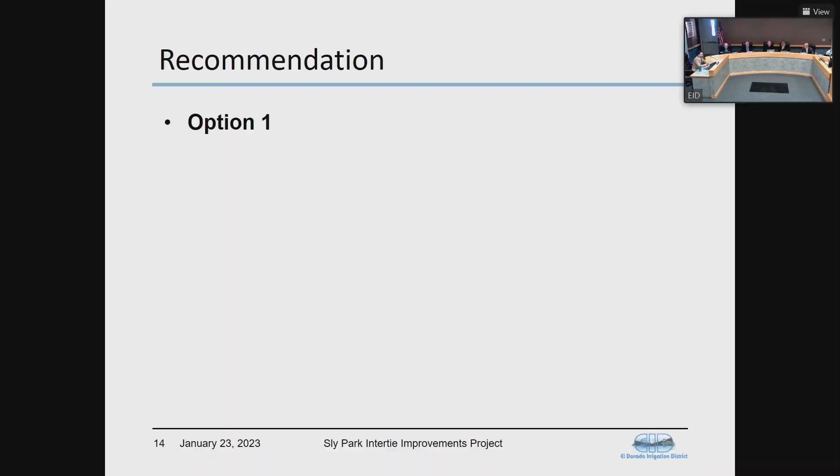Yeah. It looked like it. Now he needs a new knife. I do have this pipe at home, too. Don't worry, Director Dwyer, I still have my knife.

Good morning, Patrick Wilson, Drinking Water Operations Manager, presenting the Reservoir A Water Treatment Plant Filter Media Replacement Project Construction Contract Award. So previous board action, this project was included in the 2023-2024 operating budget and the 2023-2027 financial plan.

So summary of the issue, Reservoir A Water Treatment Plant is a dual media sand and anthracite, so 12 inches of sand on the bottom, 24 inches of anthracite coal on top. There's no solids removal ahead of the filters, better known as inline filtration. So unlike Reservoir 1 water treatment plant, where we actually have the large sedimentation basin that you can see from Gilmore Road, we really have nothing. So all the floc that we generate to remove all the particulates in the water sources, the only place that they can come out is on the interface of the media itself.

So all that loading occurs on the filters. Subsequently, we've had high filter head loss, particularly in 4 filters that we're targeting today. Of note, the media age. So traditionally, filter media, just as a wherewithal, the average for most water agencies is a replacement around 20 years. It's really dependent upon not just the age of the media, but the condition of the media.

So some of the media can be cleaned at 20 years, which we're looking at doing at Reservoir 1 water treatment plant in the next handful of years, as it's at that 20-year life cycle and is still in good shape. However, 8 of the filters were constructed in 1989, and we added 4 more in 1998. So as part of this project, we'll also be inspecting the filter underdrain system, which I'll get into a little bit later, to determine the condition and make any necessary repairs to that system.

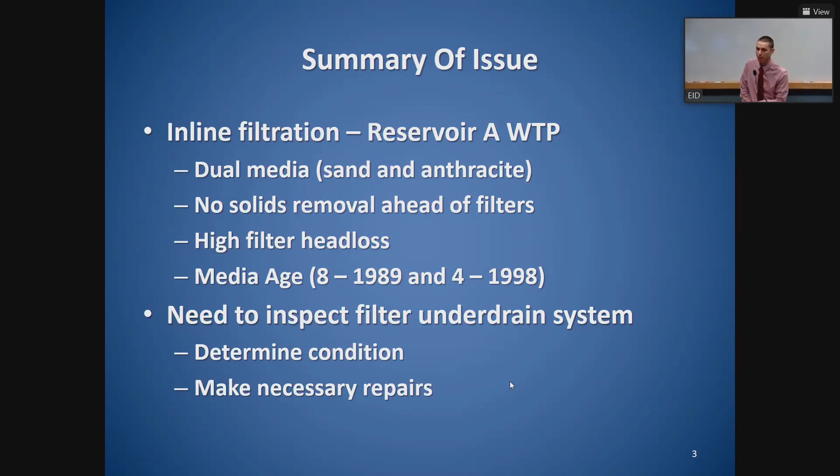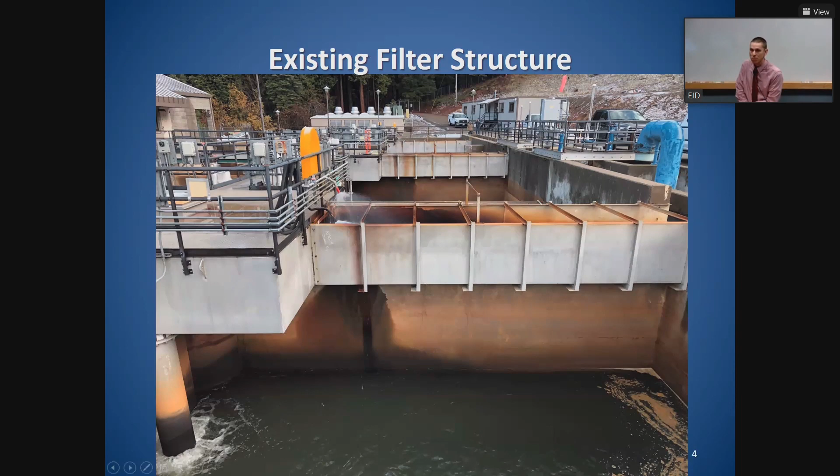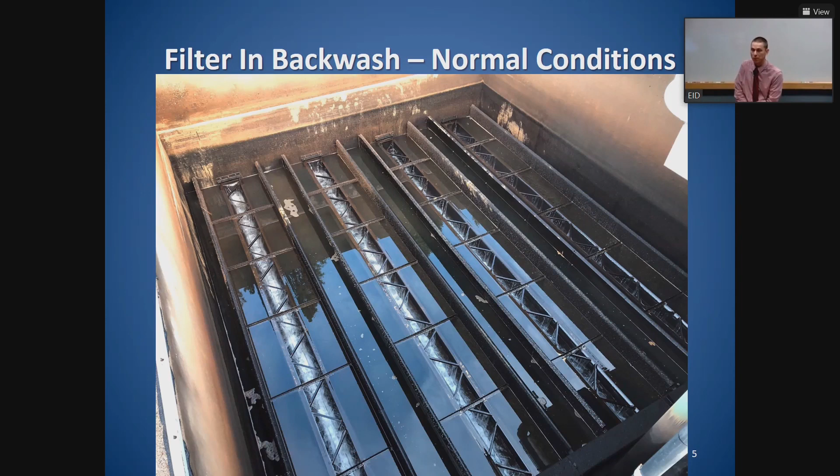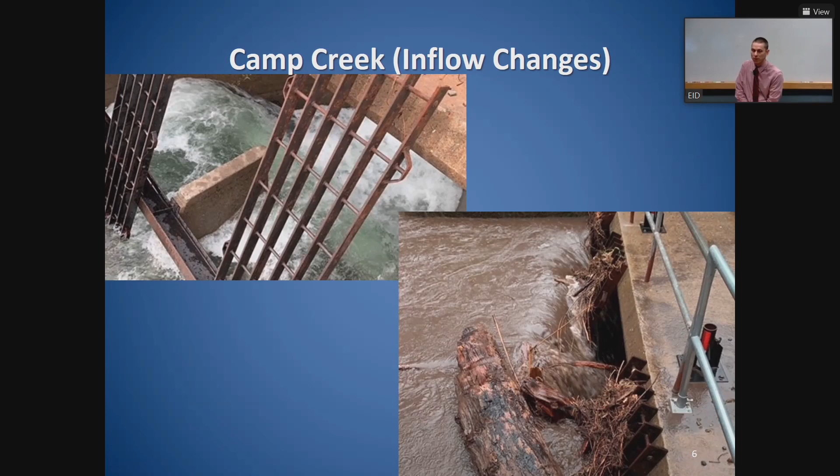Next slide, please. Then the changes happen. Politely put, top photo on the left is the normal Camp Creek inflow water, and what we experienced on the right was subsequent to the January event that we really struggled with. Very high turbid water that initially came in to the lake that we subsequently had to treat. Some parts were well over 100 NTU. Traditionally, the water on the top is around 5 to 10 NTU, somewhere in that ballpark. So 10 times that of the water coming into the lake.

Next slide. Can I ask you a question? Sure. For the people who might be listening, NTU means? Oh, you would. Thank you. Nephelometric turbidity units. Okay. So basically, it's a measurement of the clarity of the water.

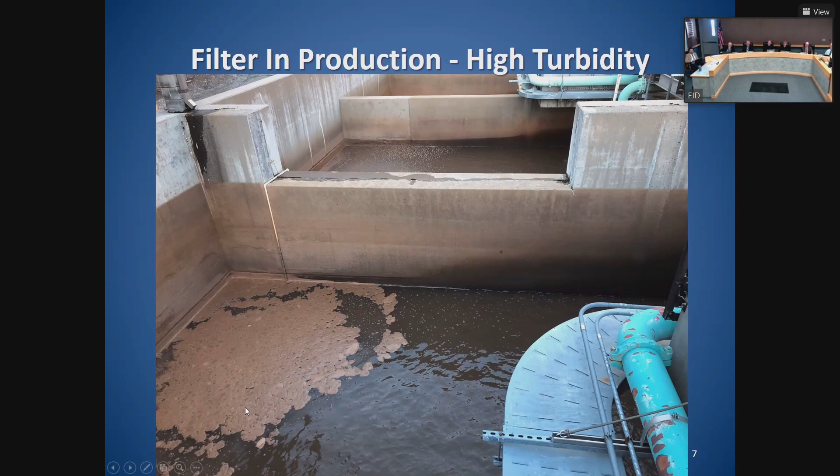That is actually at 25 minutes, and it was still not clearing up, and we had to put the filter back into production. Part of the challenge with that is you have initial loading when you put the filter back into production that aggravates and increases the head loss.

And Patrick, I know we have issues with what do we do with the backwash in treatment plant 1. Where does the backwash water on treatment plant A go to? Yeah, absolutely. Very similar to Res 1, a little bit different, though. It is returned back to the headworks of the facility. There is no sewer system for us to discharge to occasionally as we do in El Dorado Hills.

However, this system actually goes to an equalization basin, and then subsequently we add a non-ionic polymer, essentially another filter aid, to help floc out as that water goes up to the drying beds, and then it flows through the drying beds and returns to the head of the plant. That water itself, which I'll get to in another slide or two, was a great savior for us, oddly, where traditionally, during a normal summer event, the NTU of the return backwash water is very high.

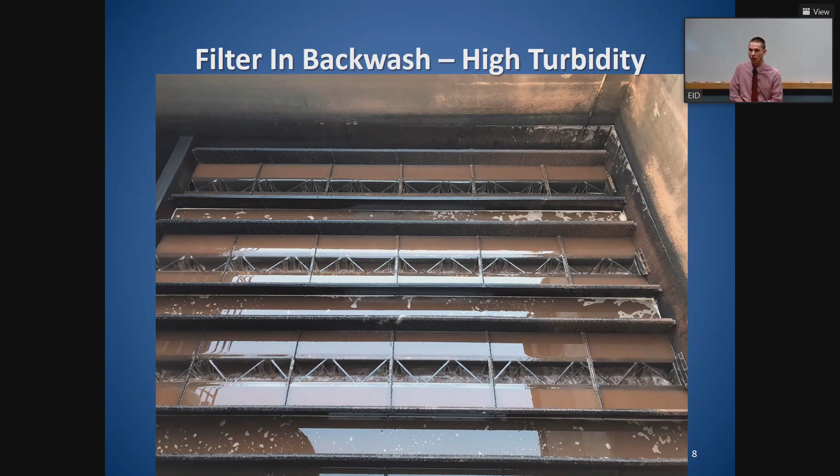In some cases, that water on the backwash return got up to around 20 NTU, but for the most part, it stayed around 10 on the backwash return for the majority of the challenges we were having.

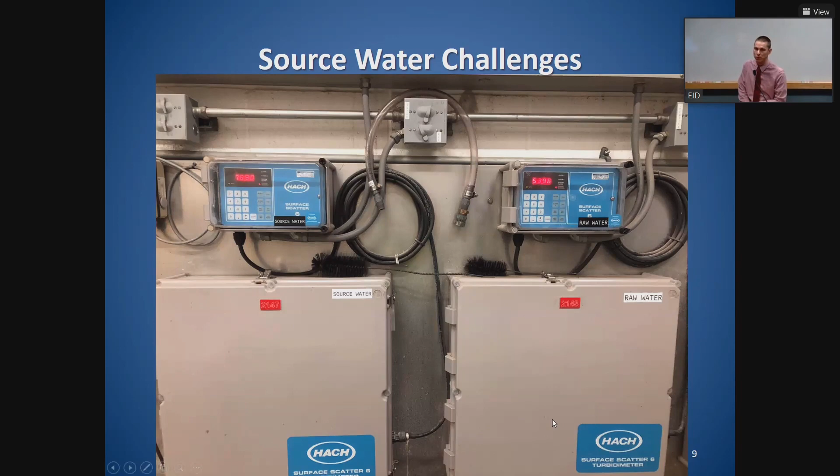Next slide, please. Of mention, filters 5 through 8 are the filters we'd like to target for this media replacement, primarily because of the head loss as well as the age. This process will include removal of the filter media in whole, inspection of the underdrain system, and replacement of the nozzles, which I brought a few examples of.

So the nozzle itself is threaded into the under drain system. The media sits on top of this, so you have sand, and then subsequently anthracite. These tiny little pores are what the water actually flows through to be filtered into the system. The little holes on the bottom, which are somewhat hard to see, that's your air purge. During a backwash, air is forcibly put in to agitate the media to release all the particles trapped within it.

These are from 1989, and they're plastic. What we anticipate seeing as part of this replacement is many of these are probably going to be plugged to some varying degree, obviously with that small slit. One of the challenges, even with the air purge we continually have at every plant, is that it doesn't get these completely 100% cleaned out. There's still an opportunity for sand or anthracite to build up inside of them. So we'll be replacing 5,616 of these between 4 filters.

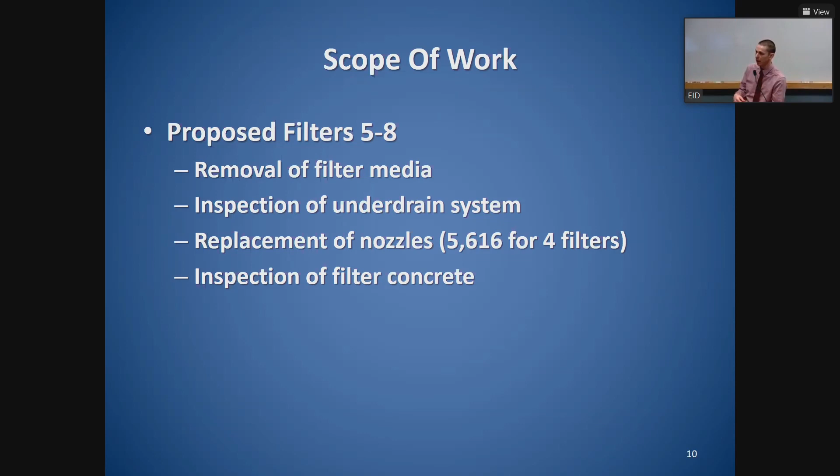We'll also complete inspection of the filter concrete. One of the challenges with the assessment Carollo is performing for the water treatment plants is that we don't have the ability to get all that media out to do a complete review of the filter. We will subsequently be doing that as part of this, to roll it into the water treatment plant assessment, but it'll be included in this project.

So the project was bid and advertised on November 10th. A mandatory job walk was performed on December 6th, and the bid opening was December 28th. MPK Solutions was the low bid at $712,733, and the engineer's estimate was $705,700.

This has been qualified as a Class 1 categorical exemption for maintenance and repair of existing facilities, involving negligible or no expansion of use beyond the existing, per the lead agency's determination. Staff has prepared, and with board approval will file, a notice of exemption of CEQA with the El Dorado County Recorder Clerk's Office.

So the funding request today is for MPK Solutions of $712,733. Option 1 is to award a contract to MPK Solutions in the not-to-exceed amount of $712,733 to replace filter media for the Reservoir A water treatment plant filters 5 through 8, which staff has determined is exempt from the California Environmental Quality Act, project number T 2022.53.